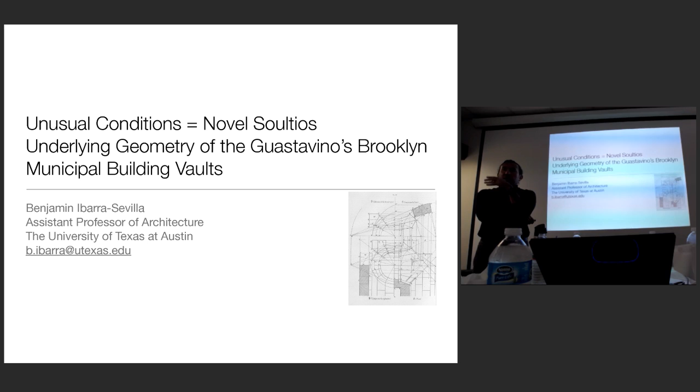For this talk, what I have prepared is a subject that I have been working on for a number of years. And as Michael mentioned, it is something that I have already presented, but I feel that it's still in the works. There are very different things that need to be figured out. When I presented it before, it was also with the understanding that it's not completely done. But also, what it proposes is the strong connection that exists in this type of structures.

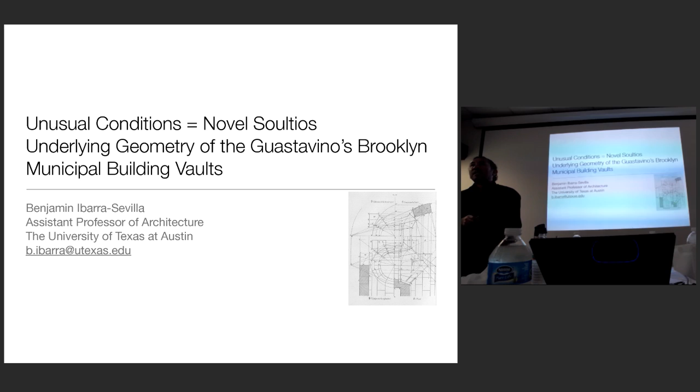I'm going to talk specifically about Guastavino's Brooklyn Municipal Building vaults, because I think they are important, but also because there is a strong relationship between geometry, gravity, structural work, masonry, and so forth. So for the first half of the talk, I'm going to try to make a case for it and get you to understand why this is relevant, and for the second half, I'll try to explain where the research is at this point.

So vaults, as we know them, right? I'm not talking about vaults that keep money in the basement of the banks, right? Once I was put in an archaeology session because they thought I was talking about vaults where people were buried, for instance. We're talking about vaults as structural and architectural elements that form space. For instance, these ones that are in a 17th century monastery in Mexico.

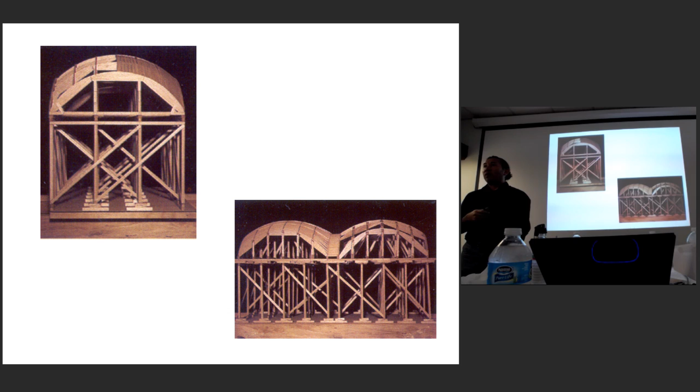I have been closely involved with the work of vaults. These are some models that I did earlier. This is me, right, back in the old times when I was even more beautiful. Right?

Don't laugh, guys. I'm serious.

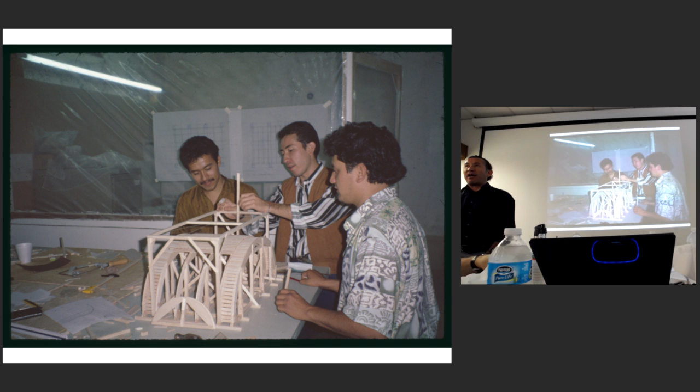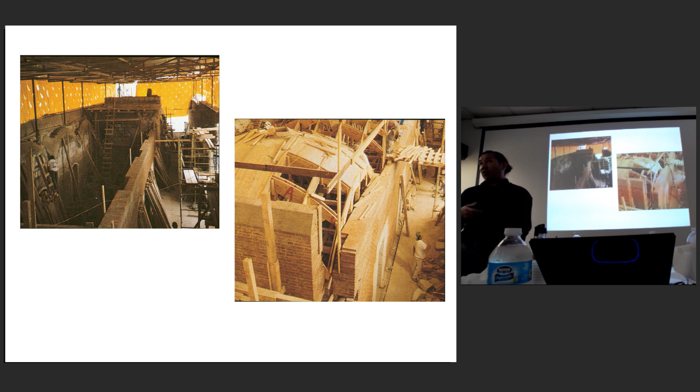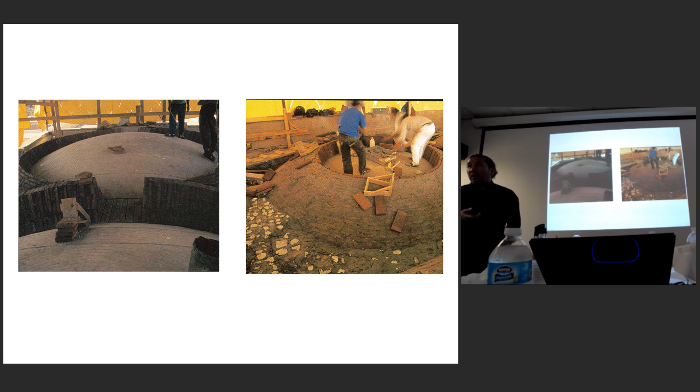So, since the very beginning of my career, I have been involved with vaults, constructing vaults. It's a restoration of a 17th century building in which we were pretty much hands-on doing vault construction using exactly the same technology as it was used 500, 400, I would say 2,000 years ago. These are vaults that you can clearly compare with vaults that were built in the Roman buildings, right?

So this experience profoundly made an impact in my life, the way I understand architecture and the interest that I have as a scholar now. So these are the same monastery. We built hundreds of vaults, all of them using traditional technologies.

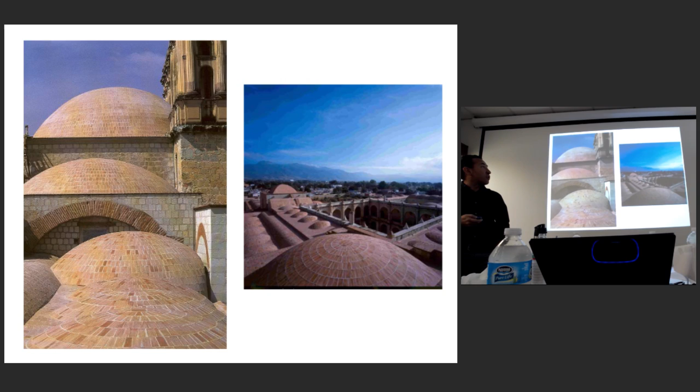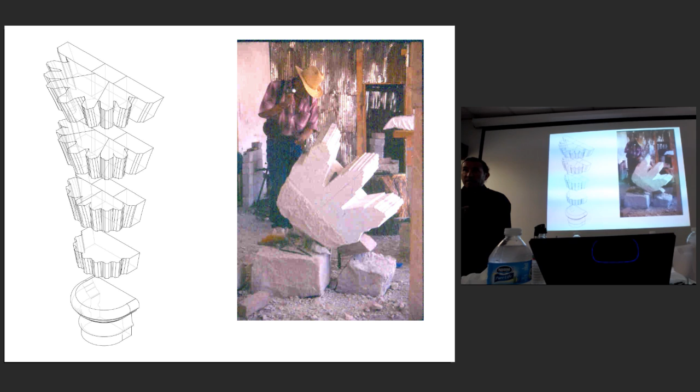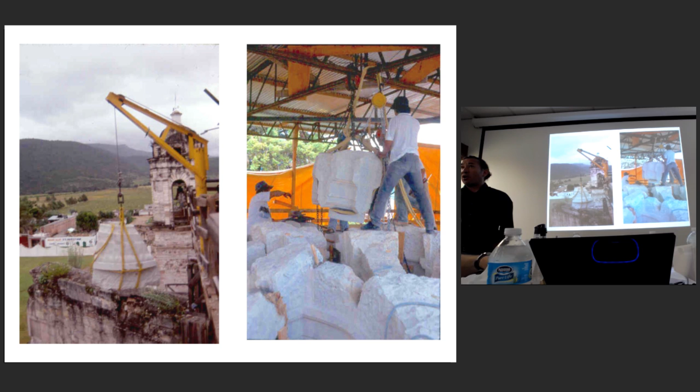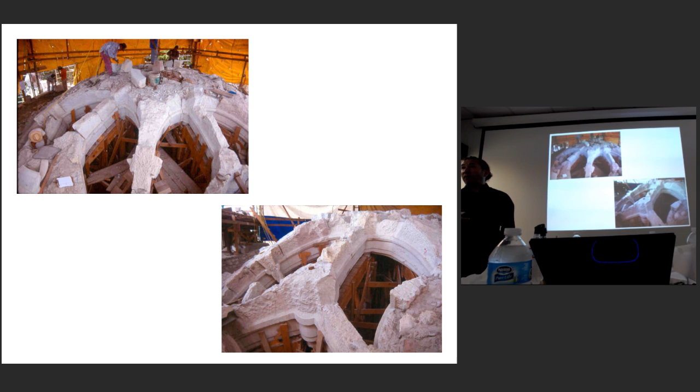I also had the opportunity to work on a restoration project where we actually rebuilt a rib vault. A rib vault that is strongly connected with Gothic methods of construction, all of those carved in stone, right, and forming a structure that is extremely heavy but actually supports itself just because of its own weight, right? Because of the shape of the pieces themselves. So going back about 800 years ago and understanding how these structures were made, actually making one, right?

At that point, I was living almost in this, it's an open chapel, it's a church, and people even believed that I was the priest, right, the local priest in town. Sometimes people wanted to come and ask me if I could confess them. Of course, I didn't do it.

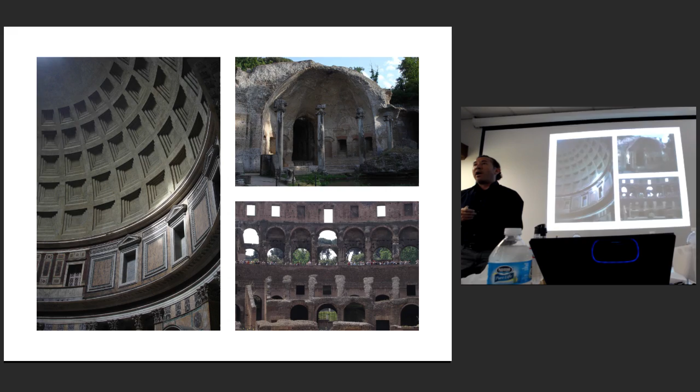So anyway, this is the final result, right? So actually going back in time. So of course, as you can tell, this has made an impact in my life, in my professional development, in the way I understand architecture, as I said. And everywhere I go, I'm always looking up, right? I'm always looking at vaults. I'm always drawing vaults. I always try to understand how they are built.

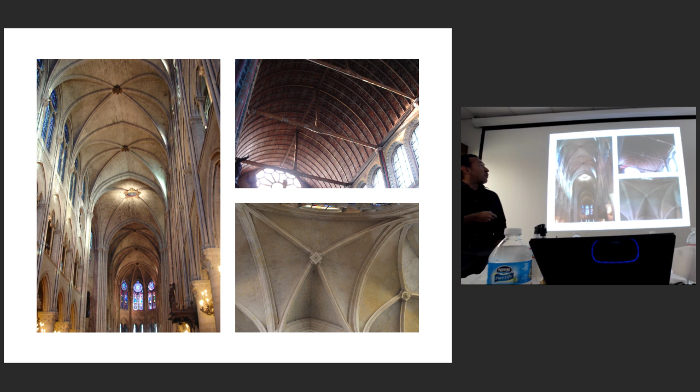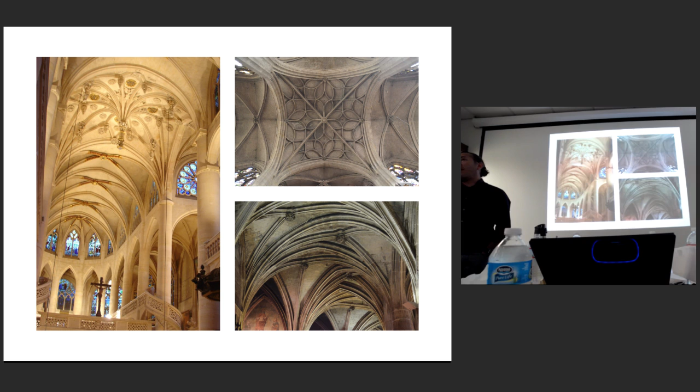Why is it that they have this presence, this geometry, these materials, right? Irregular vaults, regular vaults, Islamic vaults, oval vaults, right? Rib vaults everywhere. In historic buildings it is a very prominent type of technology that was used in many buildings, mostly in religious buildings. And we can see a variety of them, mostly in Europe, but there are also several of them here in the Americas, right?

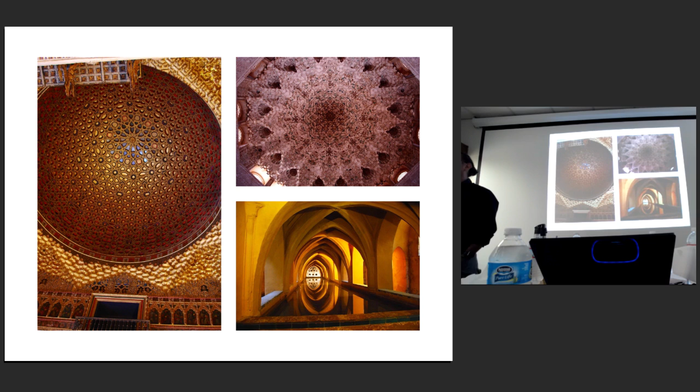This one in the cathedral in Murcia is a chapel for a king, so it's a tomb for a king, right? A beautiful one. Wood-made works for the Islamic architecture in southern Spain. This one is a theoretical surface. What is really interesting about this type of structures is the strong relationship that they have between geometry, gravity, and the space itself. When we understand the construction implications that this type of geometries have, we start getting a little bit more fascinated by this type of structures.

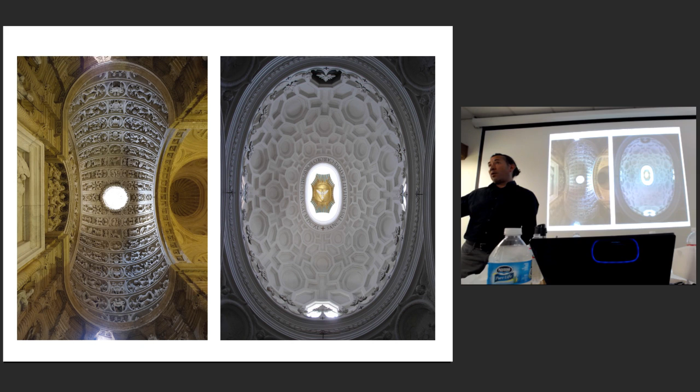This is specific, for instance, because it's an oval. When you cut a section in this direction, the section is going to be shorter, of course, than in this direction. And if you start thinking about this vault in terms of voussoirs, in terms of pieces that actually form those arches, the size of the pieces will be smaller here than they will be over here. And then we're starting to understand how they are actually built. I mean, it's a complex problem.

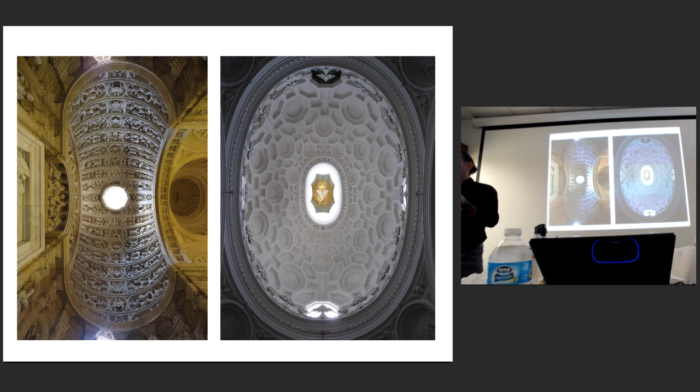In this one, there is a toroidal surface, like a section of a donut, right, that has been taken and made out of stone. So it also has different implications. And stereotomy, the science of cutting solids, you guys learn a lot about stereotomic versus tectonic, right? Stereotomy is actually a science that has to do with the study of how stone pieces are cut in order to form self-supporting structures, right?

So I have seen all types of vaults, right? Groin vaults made of stone, combinations with brick and stone themselves, right? Different types of solutions for the same problem. Vaults that curve, vaults that are flat, like this one in the Escorial in Spain. It's totally flat, well, it has a little bit of a curvature here, but this one is totally flat. How is it that that works?

How is it that all those pieces of stone are cut? There is no reinforcement, there is no rebar, there is nothing that is working in tension. It's purely working in compression. And I find that fascinating. These are other types of vaults, right?

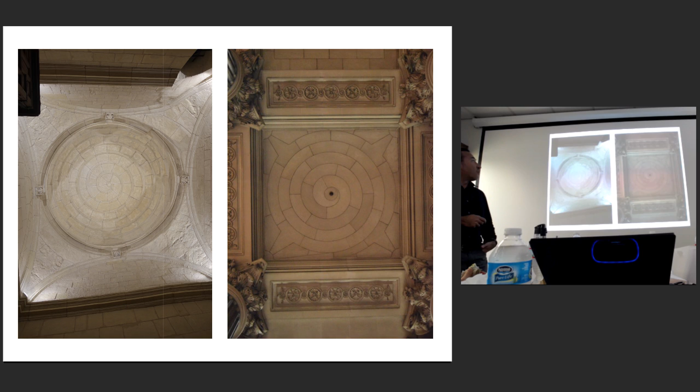Following the spiral for the type of the pieces that form the vaults themselves, the voussoirs, right? Making it even more complex, right, and playful, if you will, in terms of whomever designed these vaults. And vaults that do not exist. These are actually decoration on walls, right? They have no depth. Actually, they are just trying to show that.

So why vaults, right? Why this interest in vaults? As I have been mentioning, this relationship between form, between geometry and structure, working purely in compression. I find them a fascinating type of structure, and I think they have a lot of potential in terms of revealing how the material world works. And also, as one of the students told me here, it's because they dance with gravity, right?

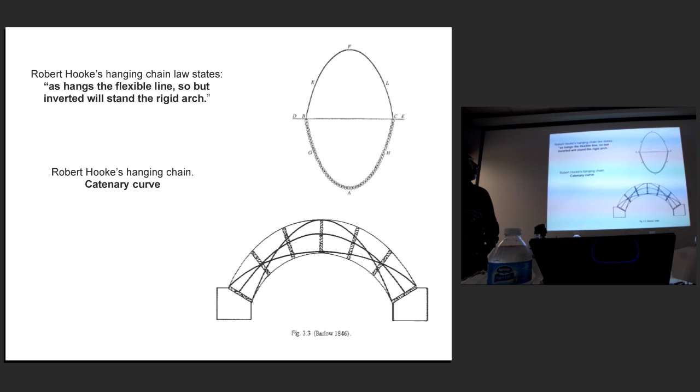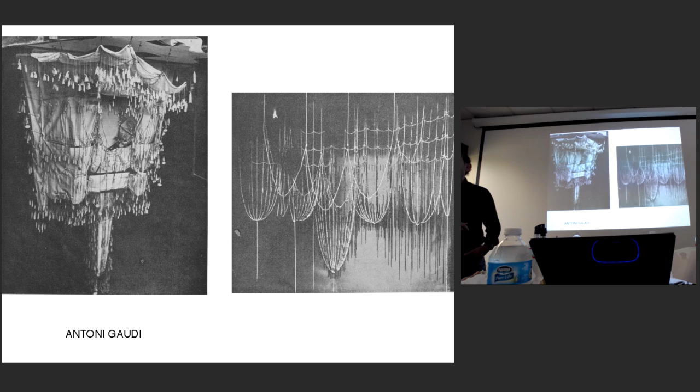Most of the structures that we see nowadays, the way we think architecture, are structures that are trying to defy gravity. These ones use gravity to their own advantage, right? So they are very intuitive, and therefore they offer extremely good lessons. So these are some of the principles that govern this type of curves. And Gaudí was very interested in this type of structural work, and he mastered it with all these models that he made. In this case, for the Güell family chapel, right?

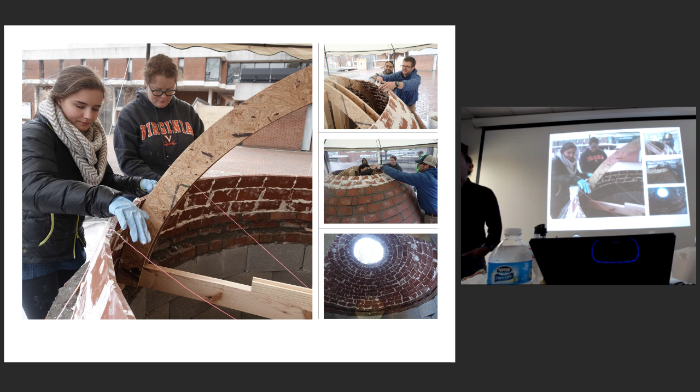So that has unfolded this interest also into a pedagogical experience, right? Teaching students and professionals from all different universities and fields around the country how to build this type of structures using what is called tile vaults. We are going to be looking at a specific type of vaults, tile vaults, and I want you to pay special attention to the methodology that we are using here. When we have tiles, we have some formwork that is actually guiding the shape, but in fact, the process of construction doesn't involve any supporting materials, right?

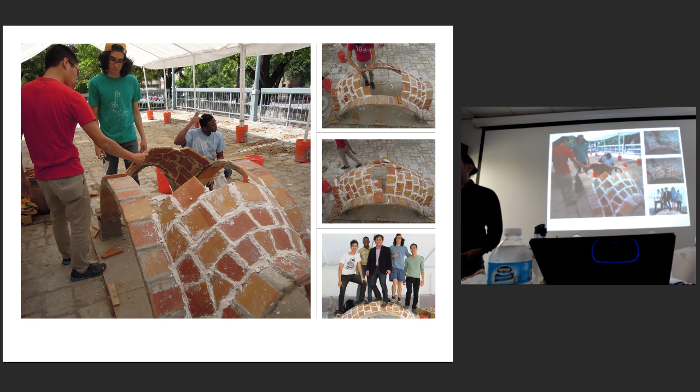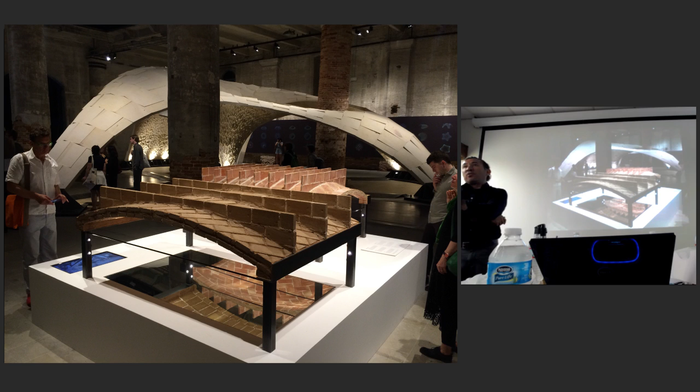We have done all this also here with my past construction class one year ago, and workshops that I teach that are related to this type of logic, this type of structures, right? So this one, for instance, involves zero formwork, right? And this is all of us over here on top of that. And that also has unfolded into what Michael mentioned. This is the exhibition I was part of. Some of you were there and saw Beyond Bending

in the Biennale in Venice, right, where we were involved in the design and the construction of these vaults that are actually presenting an alternative technology, especially for developing countries, where this type of vaults can offer a technology that can be adopted and is sustainable. So this is part of the images at the Biennale.

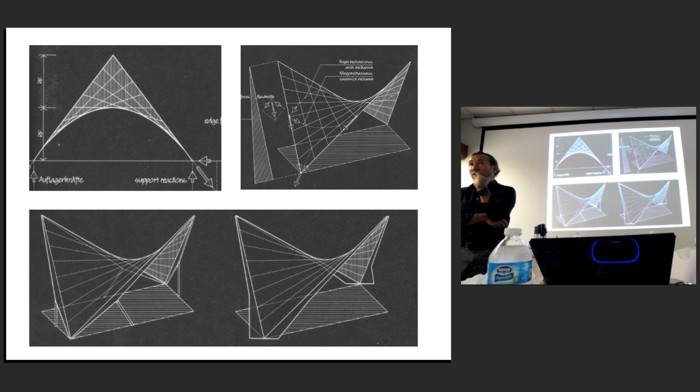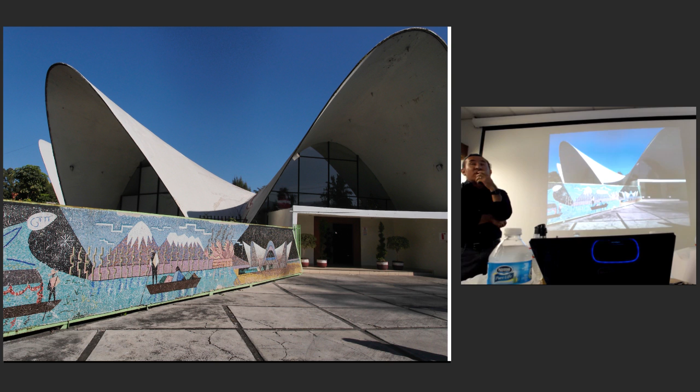So this is also a passion for vaults, right? I have actually been looking also at the work of Félix Candela. There's going to be an exhibition here coming late October on the work of Félix Candela. And my colleague, Juan Ignacio del Cueto, the exhibition that you will see here was actually at Columbia, in New York, right? So I've been fascinated by this type of structures. I said, well, as my colleague from Mexico is going to be in New York, I would like to support him and also see the exhibition.

So I ended up buying a couple of tickets and convincing my wife that we would get there, see the exhibition, and after seeing the exhibition, we would have a romantic trip in New York, right? So after the exhibition and the symposium and all of that, we said, well, let's go to a restaurant, right? The Oyster Bar, in the train station in New York. So this is my wife, Sarah, right? And she kind of realized that I was being tricky. Yes, it was kind of romantic, but there were vaults up there, and they were catching my attention a little bit more than the conversation.

So she said, you know what, my love, I love you very much. I love your passion for vaults. I really support you. But let's do something that is not vaults oriented. And I was like, yes, you are right. What do you want? She said, well, I want to go see Brooklyn. And I said, okay, that sounds fantastic. Let's do that. How do we get there? And she's like, well, subway. And I said, good, subway is a good idea. So what happened, and I swear, as soon as I'm walking out from the Brooklyn subway station, I find this.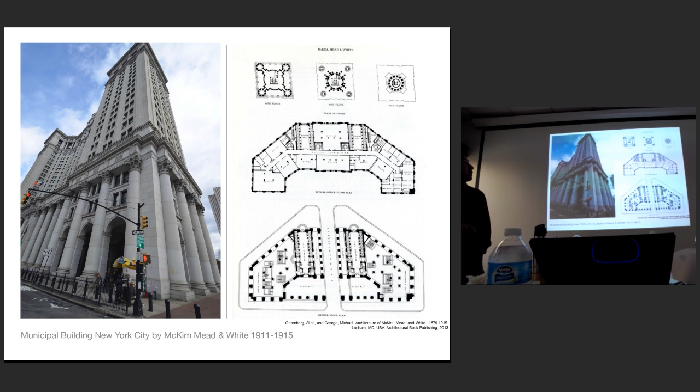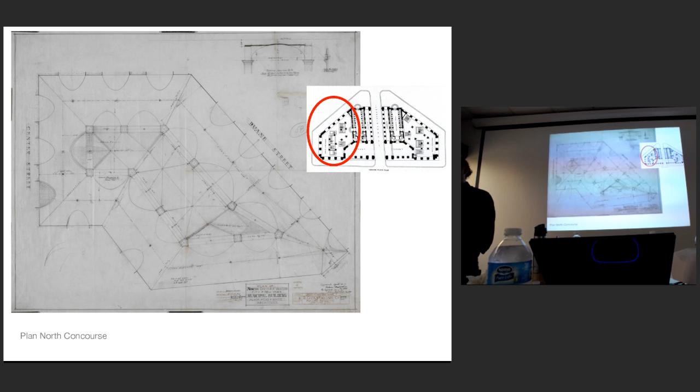And then, looking at the plan, I realized that the plan has a specific configuration, and then I went to the Avery Library and collected the actual Guastavino drawings. These are his drawings for this project, and I started to see that the configuration of the columns is pretty irregular. First of all, because of the shape of the building itself, and secondly, because of the subway going underground. This was one of the tallest buildings of the world at the time, and they had to find ways to connect the vertical supports, the columns, to the foundation and the rock underneath without interfering with the subway.

That created what I call these unusual conditions, where all the distances between columns are not even. There are very few bays that are actually regular. Generally speaking, if you look at McKim, Mead and White's drawings, when they hire Guastavino, they will have a plan. They will not specify anything. They will just write Guastavino here. And it was him as a contractor in charge of creating these drawings and figuring out the solution for these structures.

So looking at these drawings in more detail, we see that they have some sections drawn, a section here and a section here. And this first section is quite interesting because it follows this line on the plan. It's not precisely a straight section. And what it reveals is half of one vault, half of a different vault, all of them going through to the crown of the vault, meaning the highest point itself. And then it starts revealing the details of these geometries. First of all, you realize that Guastavino had, in addition to these very unusual conditions, some restrictions. For design reasons, this is something that I haven't really found out yet, it's just an assumption.

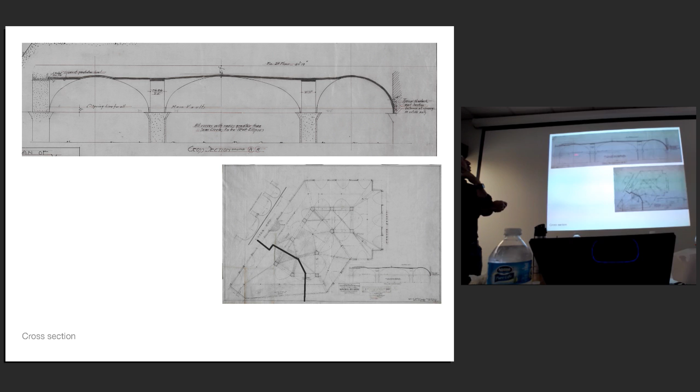And as I said, the point was to have this layer that is fire resistant, right? That will protect the structure above. And in addition, provide this beautiful space, of course. So we start seeing that. So then we're seeing details such as Guastavino saying this is now a straight section through those, what are called former arches, showing them through the crown of the vault and saying true ellipse, right?

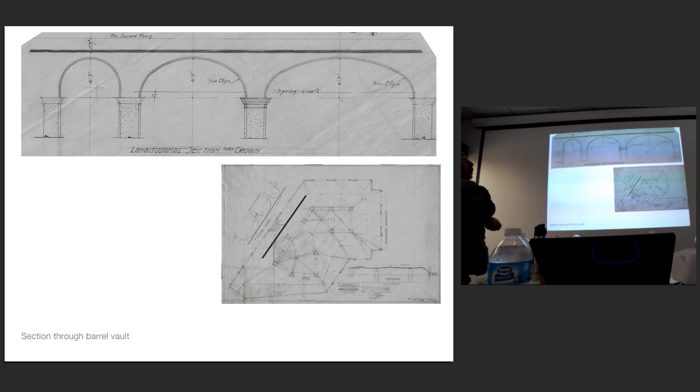True ellipse. So that also makes it interesting because we're also seeing here that semicircular arches are governing the geometry, and simultaneously true ellipses are supposed to be governing the geometry. So the very first question is, really true ellipses? And the reason why you ask is because by tradition, ellipses were not common in the construction of arches. Because in order to draw an ellipse, you need a series of geometrical procedures that are somehow

complicated, right? If you want to draw an ellipse, you need two foci, generally speaking, and once you find those foci, you can actually draw an ellipse. Or there are some other methods that, if you want to learn, I will be happy to teach you, like this one, by finding different points, by a parallelogram that surrounds the short axis and the long axis of the ellipse, and then you find points, and by approximation, you build an ellipse.

But what is much more precise is what is called the basket arch. This is the model of the basket arch, which forms almost an elliptical shape, but with segments of arcs that are tangent to each other, right? And that was very common among masons because you can control that much more than drawing an ellipse. They are segments of circles. You can find the center of the circle here, and the center of the circle here, and then draw a continuous line that is very similar to the ellipse.

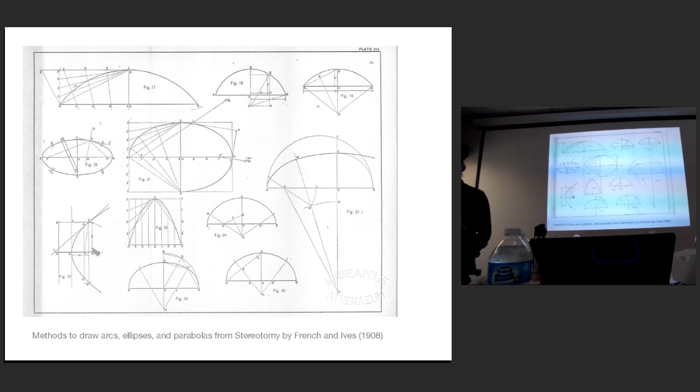So the question here is, how Guastavino understood the idea of an ellipse. Was that actually an ellipse or not? So I started to draw both. What you see in blue are the ellipses, and what you see in red are the basket arches. So you can see the circles that are involved here, for instance, this circle and these other two circles are tangent to each other and form the almost elliptical line. So in fact, when taking a closer look, you realize that even the drawings don't follow an ellipse.

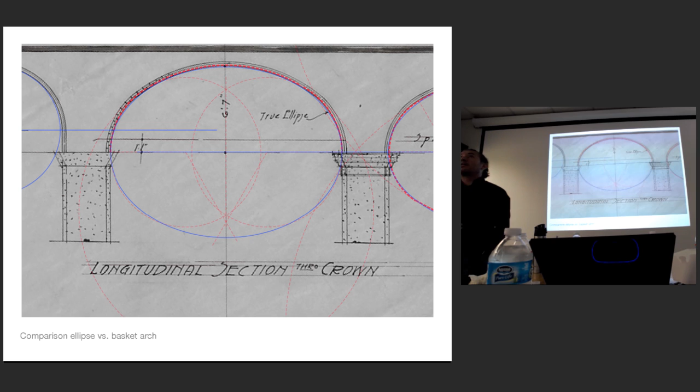They actually follow a basket arch, right? Because that was the way they drew it. That was the way they would understand it. So by saying true ellipse, I think Guastavino was referring to the basket arch, but in reality, we don't know exactly what he meant by that. But look at how close the curves are to each other, but in reality, they are,

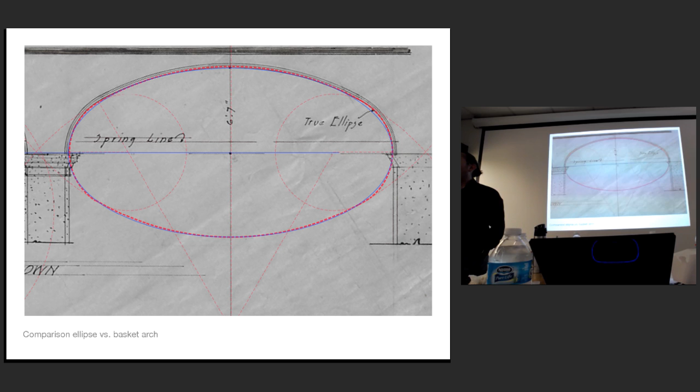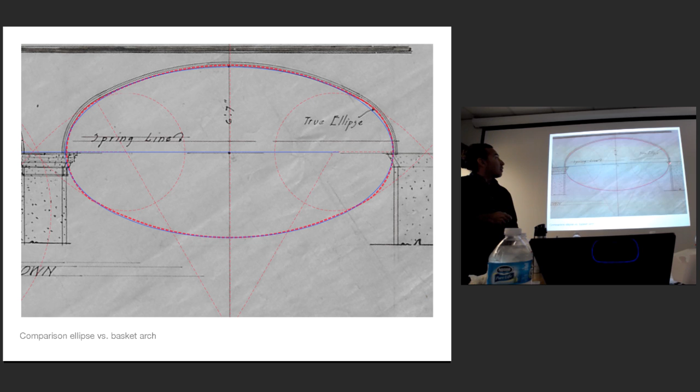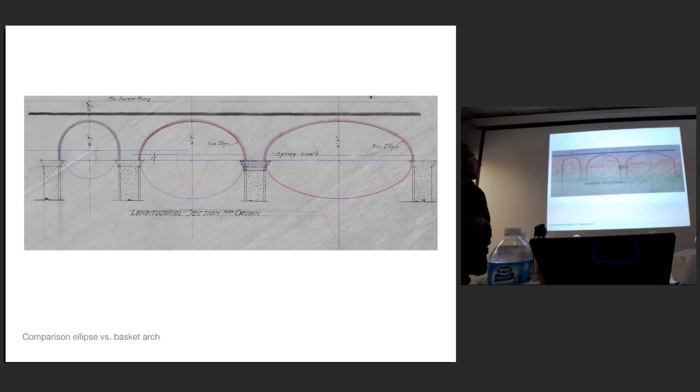yes. He specified the spring line as higher than the crowns of the columns. And when you drew your ellipse, you took the spring line to be along the line of the column. You mean here? Yeah, on his drawing it says spring line. Over here. Yeah. So that was common in classical architecture, to start the arch above the column. Yes, there is a straight line over here. And it's much more evident when you have semicircular arches, but it's not as evident with these arches. But it's true. It's another aspect to consider, right?

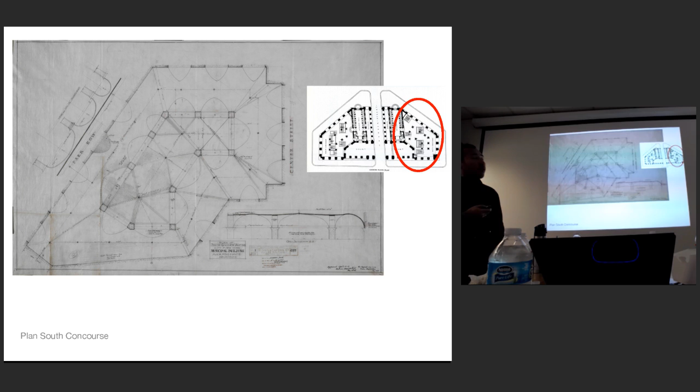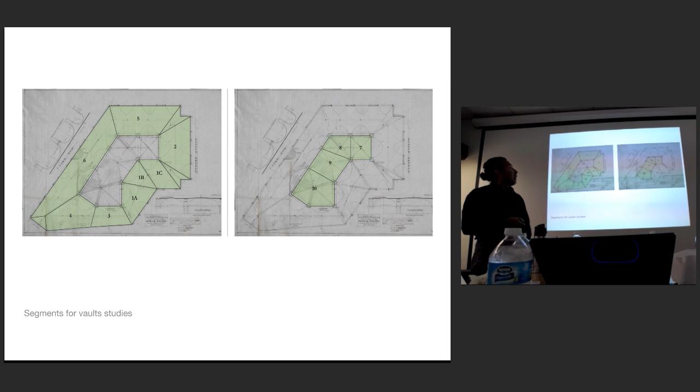So we go back to these irregular conditions, right? And then, okay, so what's the solution here? How do we find the solution? And I started realizing that if you divide each one of the bays, you get an irregular shape, and therefore you can actually form 10 different vaults, with their own set of rules, with their own set of geometries happening within the roof itself. And then let's go back again to historic architecture, historic methods of construction, right?

When you look at the different treatises and the different stereotomy documents of people who were doing this in the 17th century, 16th century, 15th century, you realize the notion of an irregular plan. This is Joseph Gelabert, 17th century master builder in the area that is now Catalonia, right? Within his manuscript, he actually talks about the solution of an irregular plan vault, which was a very common problem in late Gothic architecture, right?

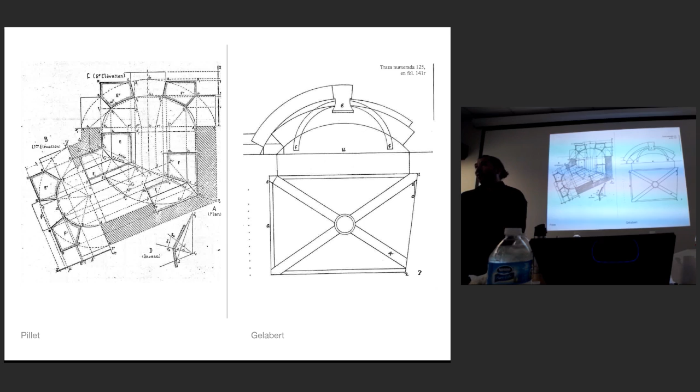We are seeing here Pillet also looking at pieces of stone of an irregular element. Perhaps this would be a flight of a stair or something, right? And how what starts as a circle ends up as an ellipse, and therefore the distortions that the piece of stone needs to take in order to adjust to that. So there are a number of treatises and problems that emerge from the notion of an irregular plan.

For instance, here, if we have a sphere and we cut the sphere vertically with an irregular polygon, each one of the arches is going to be different. And the consequence of that is that some are higher and some are lower. In a space covered by a sphere and configured by this type of polygon, there are going to be spatial consequences because some walls or windows or doors will be taller than others. And all of that is what people concerned about this type of problem were dealing with.

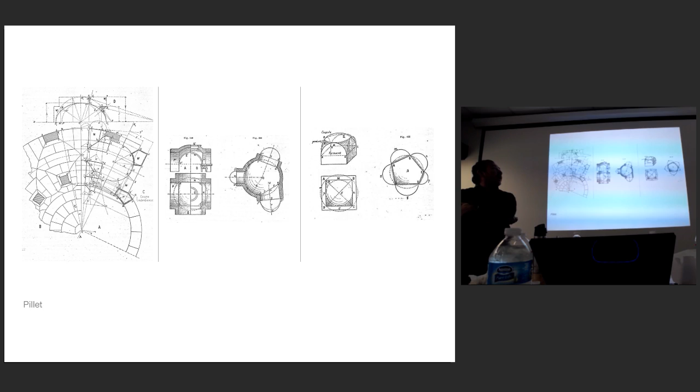And then one of the original drawings from Alonso de Vandelvira, a 16th century manuscript in Spain. The manuscript shows how to build a groin vault, how to build a skew arch, all these very particular cases of stereotomy based on arches and vaults, and dedicates an entire chapter to irregular plan vaults, because that was a challenge, especially if you think about constructing them with stone only, with masonry, and the geometrical implications.

So he starts speculating about how this can be solved, especially looking at one single surface. But he starts the chapter by looking at the first solution using ribbed vaults, in other words, identifying the area where different surfaces intersect with each other, to provide the solution for an irregular plan vault. Then at the end he shows how he would do this with a single surface, a warped surface not governed by a very clear geometry, but whose origin is in ribbed vaults and finding the lines that govern the geometry itself.

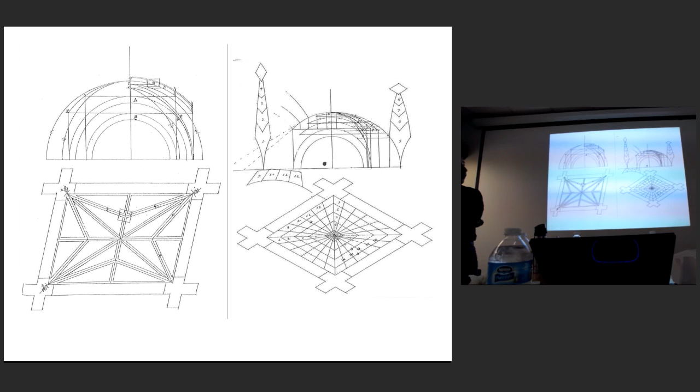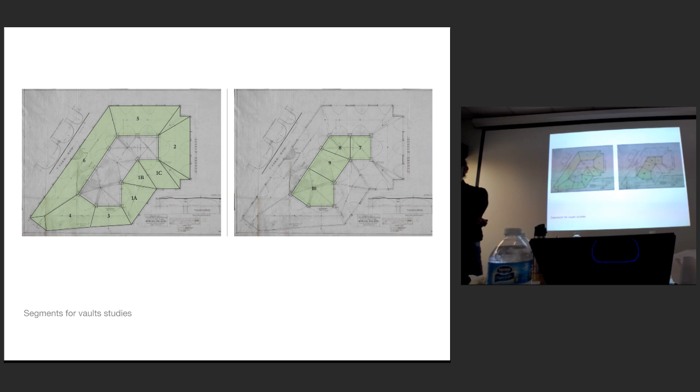When you look at Gothic vaults, the origin of the rib is mostly to control the geometry. That's one of the main functions of the rib. So it's a Renaissance master builder who goes back to Gothic methods of construction in order to find the solution for a contemporary problem. And when we look at Guastavino's problem, we start realizing that it has a lot in common with the problem that Vandelvira proposed.

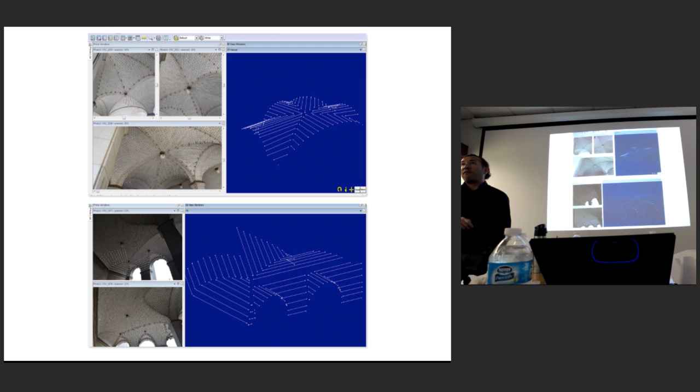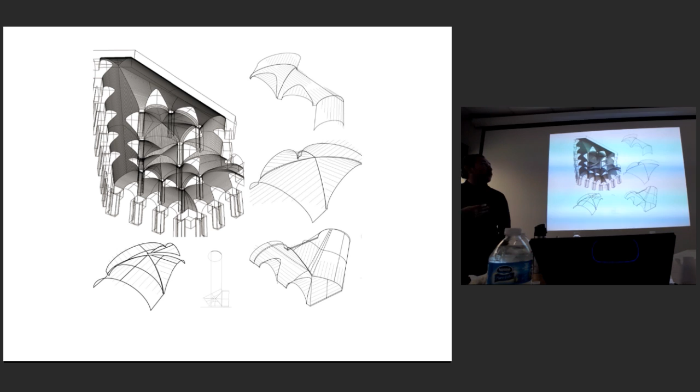So the very first thing after the photographs I took is to insert them into photogrammetry software that helps identify several points, and it was relatively easy here with all the reference points that the masonry itself offers, in order to start reconstructing surfaces within the digital environment. So referring points to each other, then looking at what actually governs this geometry, and modeling in order to identify the main issues here.

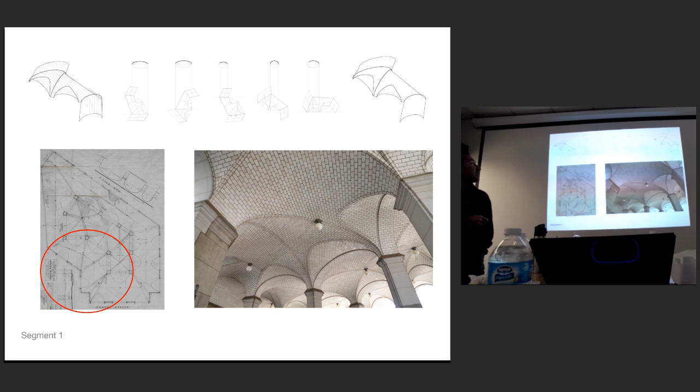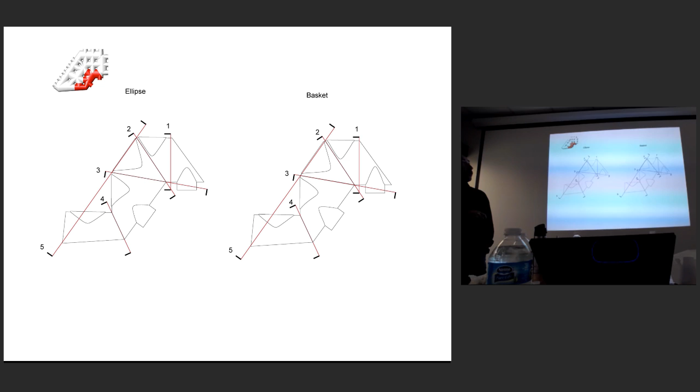And then realizing that in order to understand how each one of these vaults is built from the geometric point of view, it's necessary to make sections through each one of those arches. And as you make sections through the arches that govern the geometry of all the vaults, you realize that what Guastavino controlled was the intersection of the surfaces, but the surfaces in between were pretty much a consequence of this initial geometry.

Does it make sense? Yes? No? Mm-hmm. Yeah? Más o menos?

Okay. So in other words, what he's controlling is this rib, this intersection between this surface and this surface. In this case, for instance, it will be an elliptical or basket arch, straight barrel vault, right?

That intersects with this surface, right? But guess what? An ellipse, the equation of an ellipse is an equation of second grade. So when you connect two ellipses together, the curve that they define is not a straight curve, right? That's why also he had to control the seam between the two surfaces, and this was also pre-defined. So what governs the geometry is this arch and this connection, and what happens here is what the mason wanted to happen, what the final solution would be.

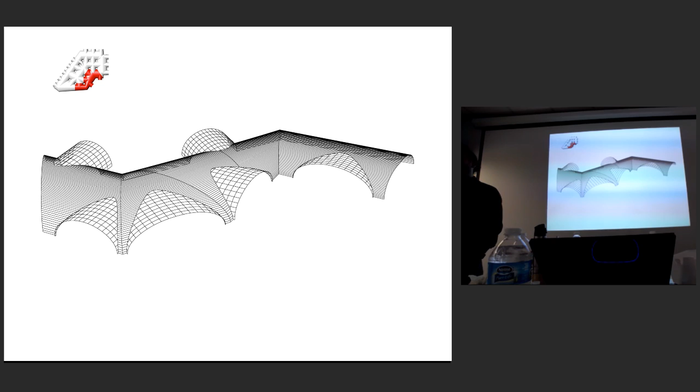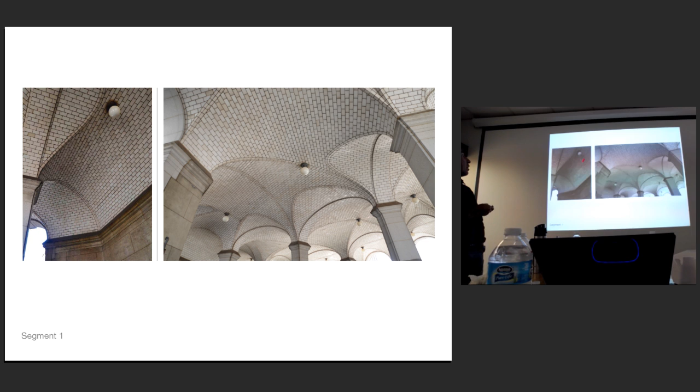So that is at the end what is actually going on here, and in all these different areas, right, we see this intersection between this surface and this surface and these surfaces here. When you look at these intersections in plan, they define straight lines, right? They are straight lines in Guastavino's solution. Therefore, two ellipses intersecting each other, especially if they have different widths, will be very, very difficult to control.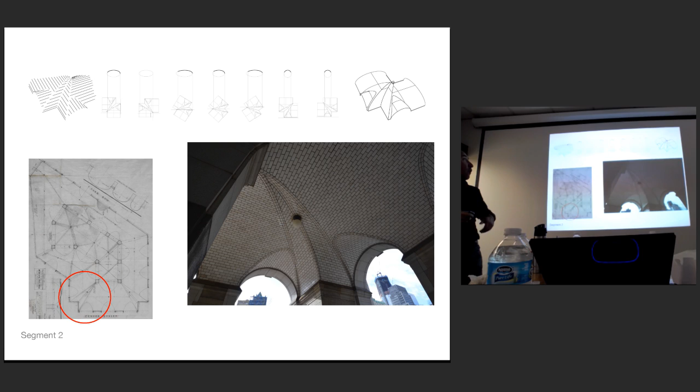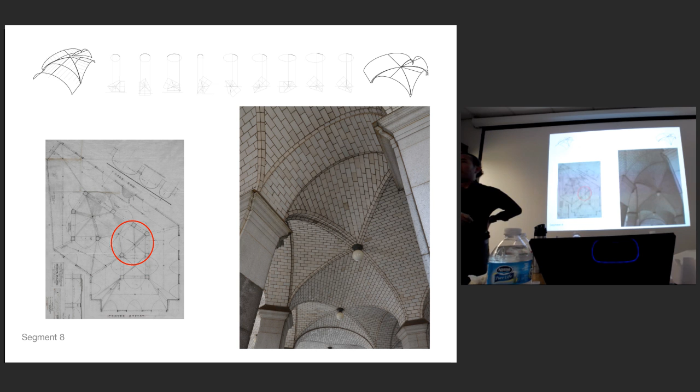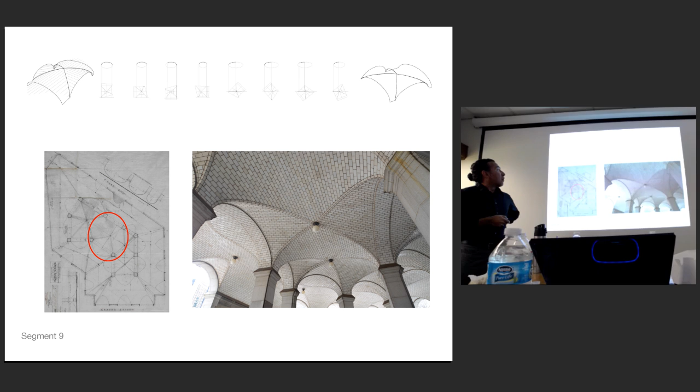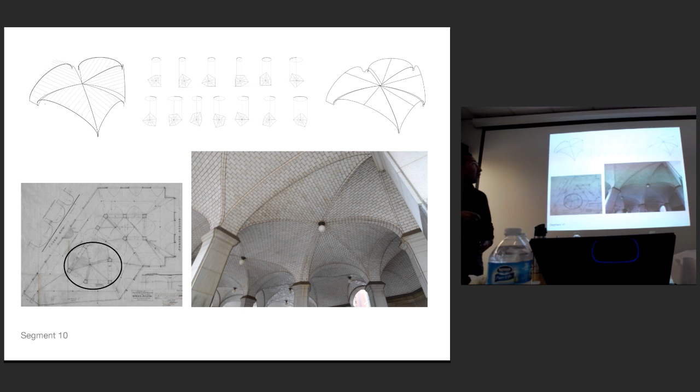So controlling this was the secret. And also having, of course, a very skillful set of masons who were able to identify. That's why you can see that these are marked originally, and the surfaces connecting each other work that way, right? So continuing this analysis will confirm this. I'm in the process of getting nicer drawings, because these are kind of preliminary, different ways of looking at how this could be represented. So that's also part of the questions that I think will emerge from this

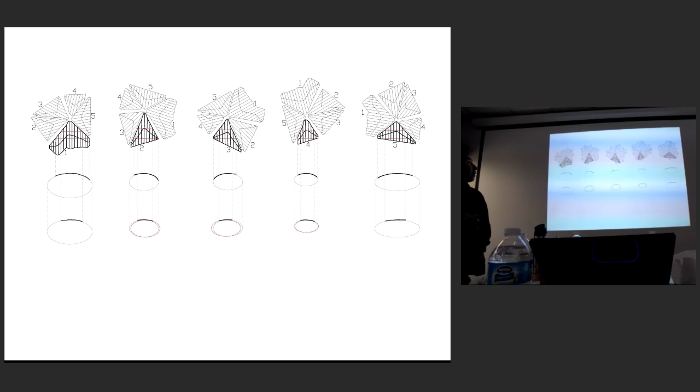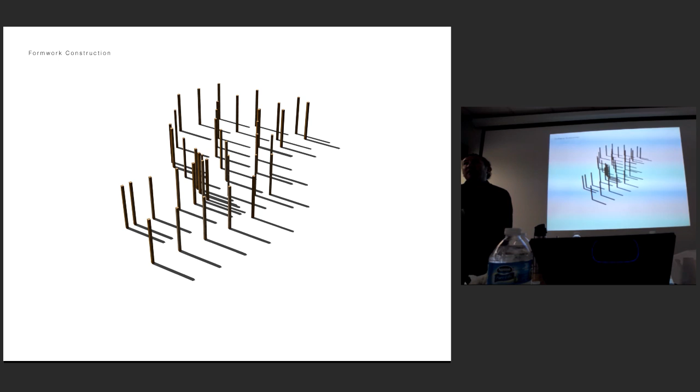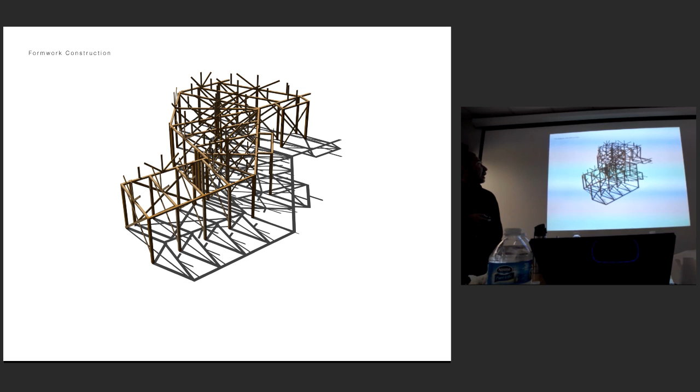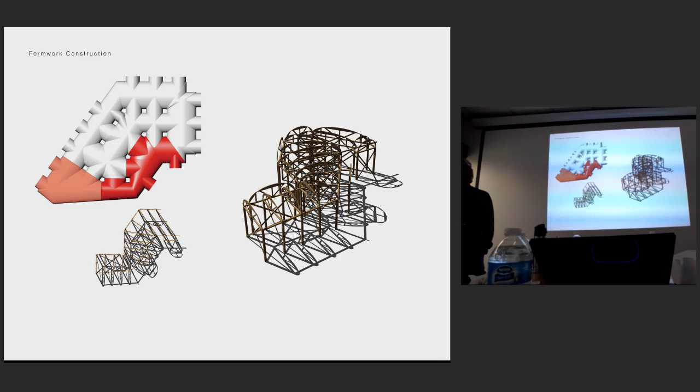body of research, right? And of course, looking at how these were built with the necessity of controlling that rib, that intersection, the groin where the two surfaces converge. Then looking at ways in which some of the formwork, as I showed you before from the ones that I have built with students, will have to be built so that the geometry is controlled, in order to come up with these results.

But also what I found interesting learning here is that Guastavino went back, similarly to what Vandelvira did, to Gothic methods of construction. And if you think about these vaults, you can even propose that these are one of the latest Gothic vaults that were built, because they follow exactly the logic that Gothic master builders used in those historic buildings. And with this, I conclude, and thank you very much.

Go to the Guastavino's afterwards? There's a fancy restaurant called Guastavino's under the 59th Street Bridge. Yes, no, I haven't been there. I just thought you could have taken your wife there. Sorry, yeah, probably not.

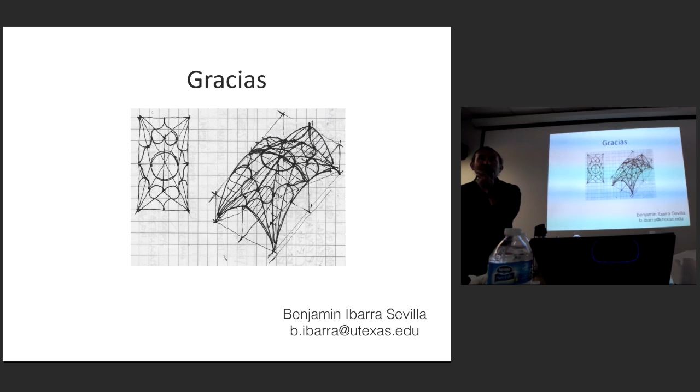Can you say something about how thick those tiles are? Those tiles are structural, not decorative, right? They are structural, and they vary, but they are about a half of an inch or 3/4 of an inch thick. And that's it? It's just that, and then there's air? Two layers. One that has this glazed finish, the one that we can see here, and another one that is rougher, less finished. So total thickness is maybe 3 inches. Yeah, something like that.

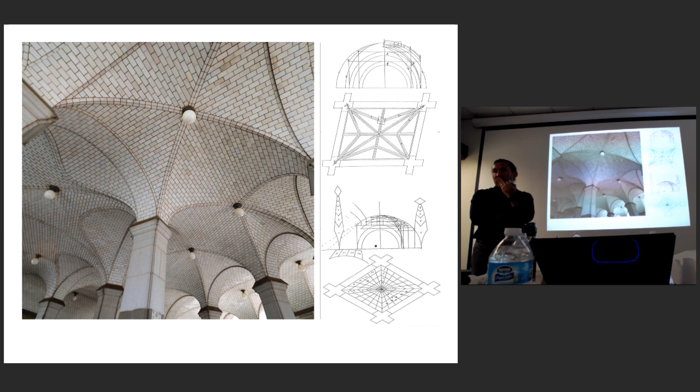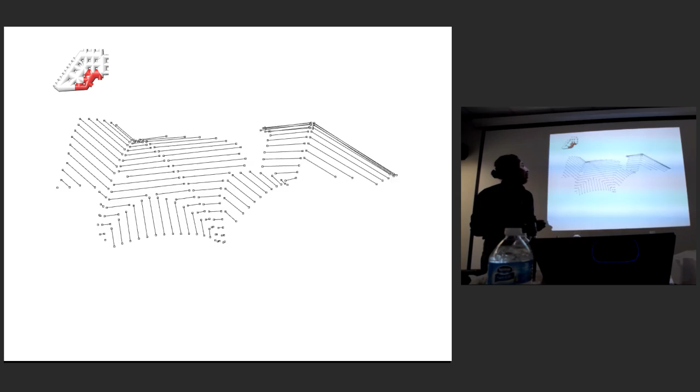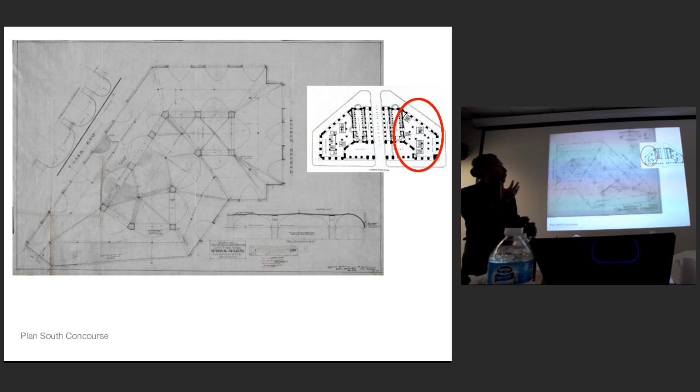The image of your students making it, it looked like the tiles weren't in a running bond. It looked like they were laying one on top of another. Maybe they're not staggered the way you do a running bond. Let's go back to the beginning. I will say that on these vaults, the surface that we see is a lot more carefully made, right? We can see it's very precise.

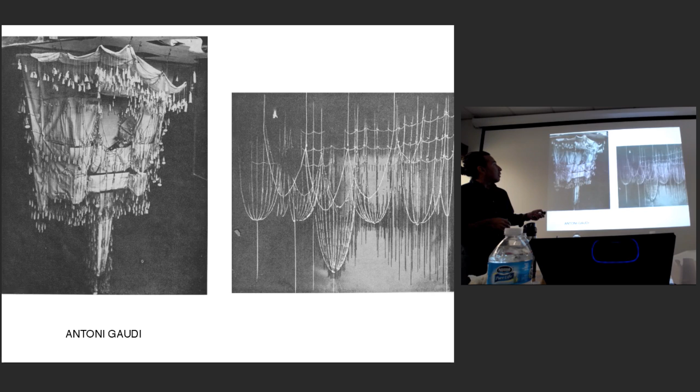But that's laid first, isn't it? That's a very good question. That's another question that we all have. I mean, even this group that I've been working with, we don't really know. Well, we are talking about this, right? I think you had some slide where they were making it. This one is a replica of the dome. Yeah, this one.

Here, right? So the intention was for students to learn about how you build this, right? There are different ways of addressing this. One will be to make arches that are parallel to each other, understanding that the arches are always going to be working in this direction, right? And then the groin is going to be where the two arches converge and then transfer the load towards the support.

Of course, it's a very sloppy process at this point, but you can see the logic: an arch here, another arch here, another arch here, and then perpendicular to that arch, right? And the point where they both converge forms the groin.

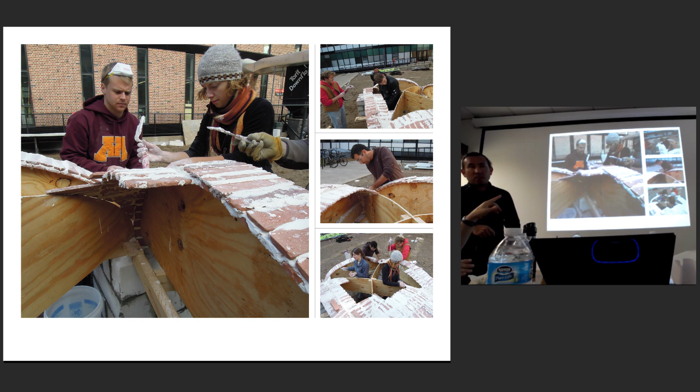I guess my question was, I know very little about how tile vaults are made, but I had thought that they would stagger one tile from another just simply by the geometry. The joints wouldn't line up. They wouldn't line up. But when you build a second layer, this second layer over here, we don't have photographs here, you make sure that the joints do not line up vertically, right?

Maybe it should look like they did it. This is a little bit thinner, but this is about the proportions, the relationship between how thick it is and the span. And in this case, we couldn't fit any more students. Let's have some questions from students.

I'm a student of life. Okay, let's have some questions from older students. Okay, older students. Yes.

Can you get into the cavity between the two? That's one of the things that I still need to find out. My hypothesis is that yes, you can. It is just open space between the vault and the actual intermediate floor, because it's structure. All of it is fire cladding, right? It's self-supporting, but not supporting anything.